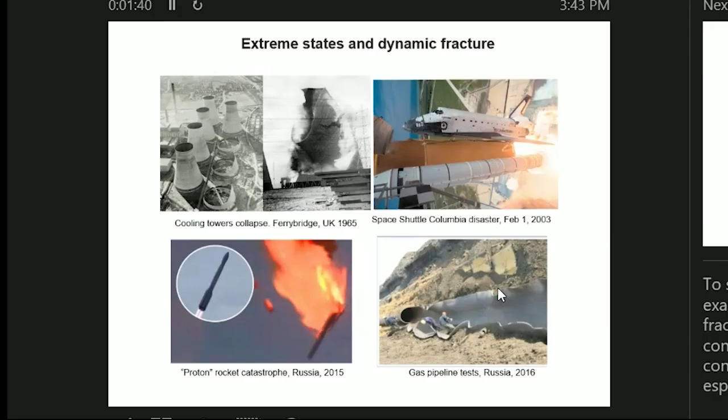I'll skip this motivation part. It's obvious that it's very important to know some dynamic characteristics and parameters of the fracture process, to prevent these kinds of events, for safety and so on. We use materials in dynamic conditions all the time, in aerospace, defense, microelectronics, but surprisingly we still don't have proper engineering standards for dynamics.

And why? It's because the material parameters measured under slow loading in static conditions become dramatically unstable and unreliable under dynamic conditions.

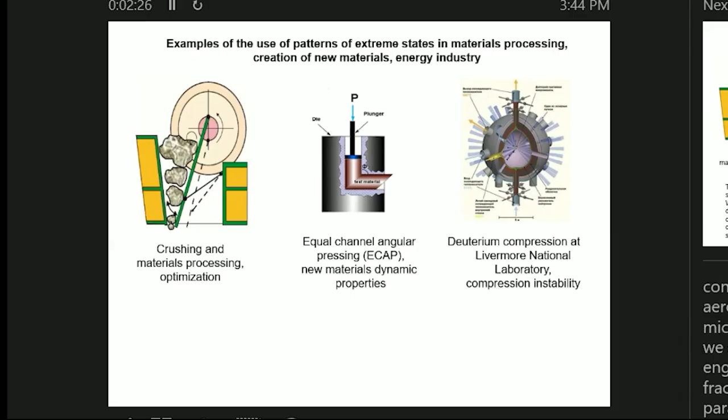But I'm going to emphasize the main question: do we actually think dynamically? It seems that by default we think quasi-statically, looking for equilibrium even in dynamic situations. And it prevents us from understanding some of the principal features of dynamics.

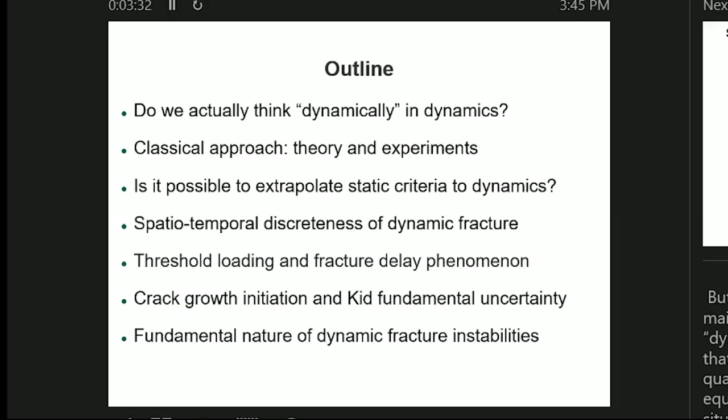I just want to start with a very simple, even primitive example of the problem of tension of a rod that I work out with my students, just to demonstrate this thing. I mention that I stretch the rod in statics and in dynamics, and I'm interested in the internal energy of the rod. The internal energy of the rod in quasi-statics is P squared, where P is just a stretching force.

The static task is boring, very boring, but dynamic looks much more fun. We have to solve the wave equation with boundary conditions, and then I'm interested in this energy, internal energy. This is an integral over the rod. It consists of two parts: kinetic energy and energy of deformation.

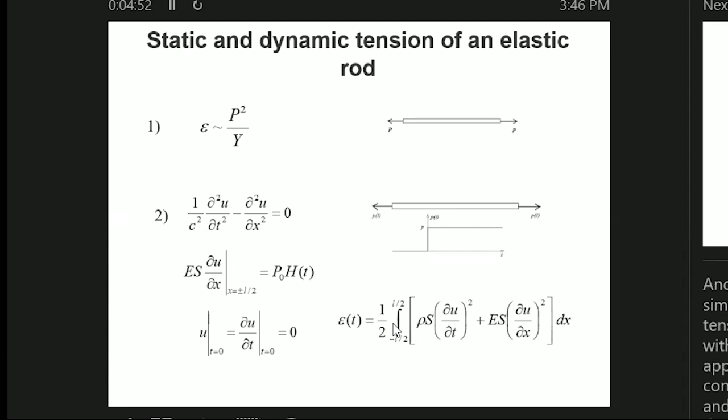So I will just calculate this integral, and the result is over there. So we have an internal energy of a dynamically loaded rod, which looks kind of paradoxical. So the energy disappears periodically.

Imagine that I have a rod, I apply tension, and I keep these forces constant, and the internal energy periodically disappears. The question arises: where does the energy go? It looks like a paradox, but actually everything is okay with the energy.

Just remember that we have a force potential, and the total energy of the system must include the force potential here. Being included in the Lagrangian, we will have a Hamiltonian principle, which would give us our problem.

And so there is an energy exchange. Mathematically this is a force potential, but engineers would say that there is a loading machine. And the whole system is a rod plus loading machine.

This is an energy exchange between our rod and the loading machine, and it comes to this effect, so that it seems the energy disappears periodically, but it is just an energy exchange. Our rod is like kind of breathing - it takes energy from the machine and gives it back. This is dynamics, as opposed to statics - the simplest problem of rod tension demonstrates the principal difference of statics and dynamics, even in these equilibrium conditions.

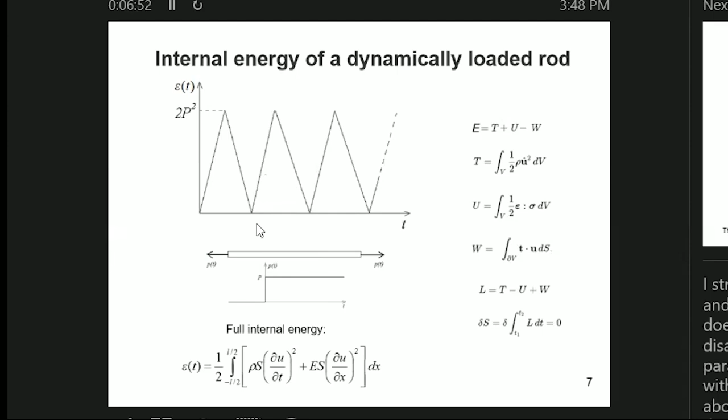And it is well known in practical engineering. Engineering practice knows this, and it works in the industry. Optimal characteristics of periodic impact are possible, and it's used in the crushing and processing of mining materials. Industrial engineers know well that the average lumpiness of crushed rock, or the average size of rock pieces, is very important for frequency and impact duration control. So it is utilized, okay.

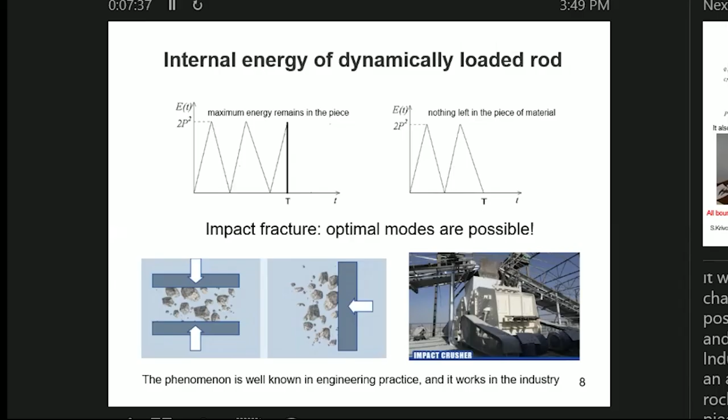This turns out to be very fundamentally important when conducting dynamic tests on materials for crack resistance. Removing the load before the moment of fracture allows you to know the energy of the samples and the characteristics of crack propagation in extreme dynamic situations.

This is a magnetopulse generator we have; we utilize this system to produce explosive-like controlled loading in the plate. This is a plate with the crack, and we can produce a magnetic field here, which gives us the controllable pressure at the level of a chemical explosion. In this case we have a fracture event just at the moment when our sample doesn't interact with any support, so we can know all the energy stored in the sample.

And so it allows us to evaluate the so-called Griffith's constant in dynamics. We did it, and this Griffith's specific energy constant in dynamics, at microsecond duration, turns out to be 20 to 30 times bigger than the same characteristic in quasi-statics.

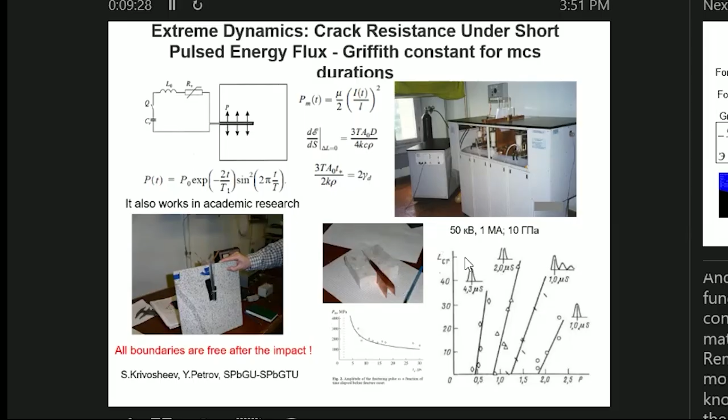This is a very closely linked problem, the simplest primitive problem of rod tension and this experimental technology. They are based on the same principle. As for fracture mechanics and crack propagation, this is just a classical approach, with Griffith's traditionally crack growth described using stress intensity factors, and particularly Irwin's criterion coming from the Griffith energy flux idea is utilized.

The thinking for dynamics is that once you know the material, there is a unique relationship between the crack velocity and the stress intensity factor, or the energy flux needed to sustain crack propagation. This KV relation between K1 and velocity is supposed to be a material function. It directly follows from the energy balance, Griffith's energy balance, applied to the dynamically loaded, moving crack.

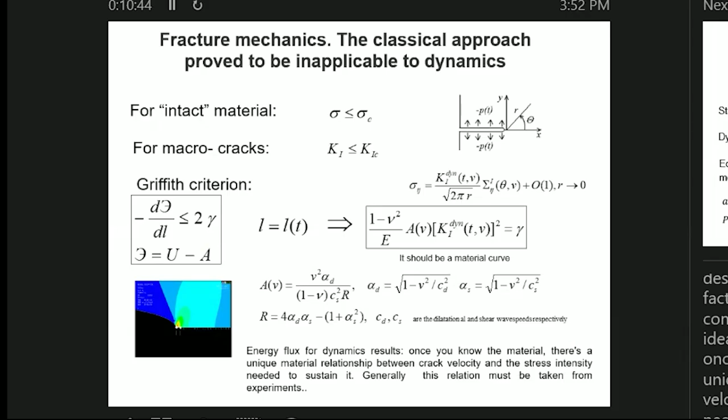And in terms of stress intensity factor, we have to talk about the right parts of these critical conditions, when we have a dependence - strain rate dependence, loading rate, local loading rate dependence, or dependence on the velocity of crack propagation. This also is interpreted as a material property. It's just an equivalent approach.

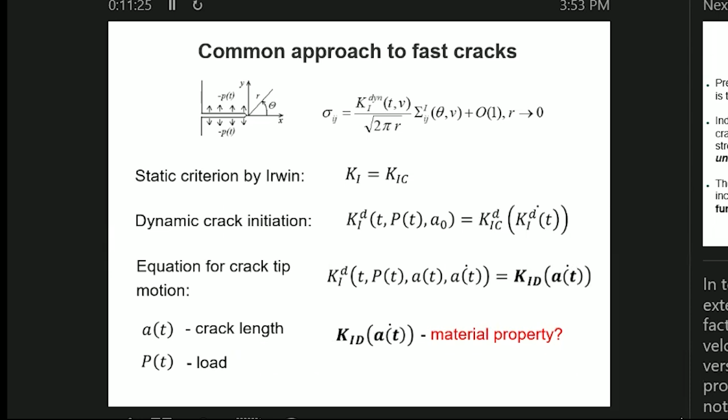But is that actually a material property? Experiments suggest it may not be so simple. From this classical approach it follows that it predicts the maximum speed a crack may attain as the Rayleigh surface wave speed, and it indicates there is a unique relation between energy flux, or crack driving forces characterized in terms of dynamic stress intensity factors, and the crack speed.

So a unique material curve is required, taken from some experiments. The classic model and the majority of its modifications include the dependencies of the considered material functions as the right part of these previously written equations. How is this confirmed by experiments? This is a result of extrapolating our quasi-static thinking to dynamics. It is only partly confirmed by experiments - I would say even that nothing of that is definitely confirmed by experiments.

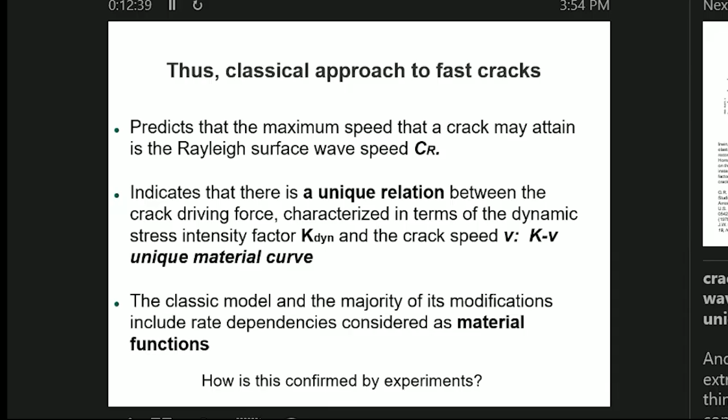So this is how it looks in the experimental field. Let's look more closely at that. This is a classification of some experiments in this field. I took only classic measurements, and this classification is very conditional and approximate, but it reflects our situation well.

In some experiments, like Irwin's and Dally's experiments, very classic experiments, we see smooth and consistent KV curves like this one - a KV relation. Others, like Kalthoff's experiments, show major differences depending on the sample geometry. He used different geometries of the samples and established that this kind of KV dependency is not a material curve - it depends on the geometry.

There's another group of experiments. The first group is associated with slow loading, when we accelerate the crack from zero to some essential velocity. But there is another group of experiments with impact loading, such as the Ravi-Chandar and Knauss experiments, a very famous classic work.

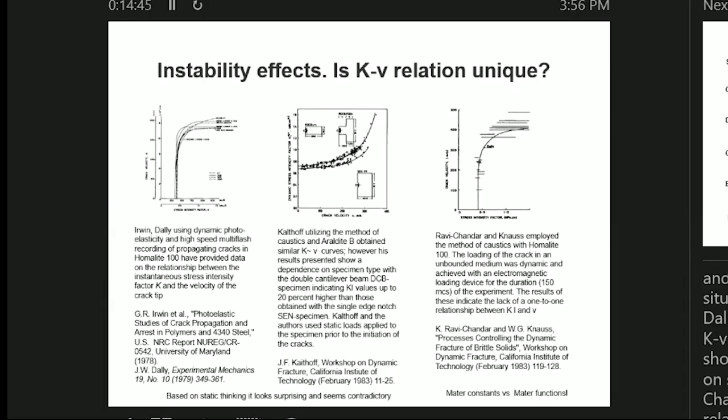It just looks very contradictory. To make sense of this, we've been developing a new approach over the years, built around a different idea - the characteristic time. We have dynamics, and there is a very essential thing - a time scale should be involved, not only as a parameter, not only as an additional dimension.

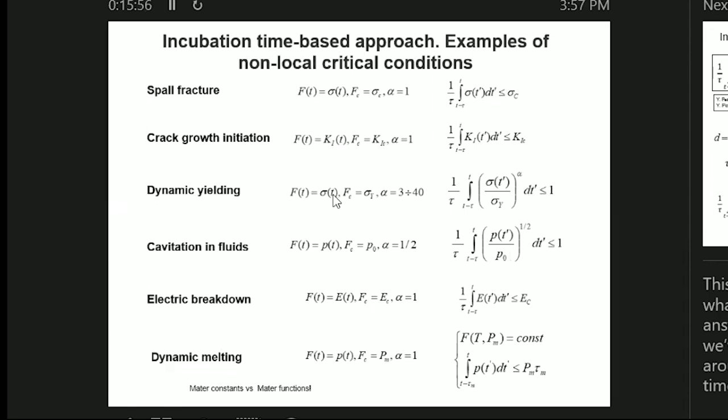We are talking about the characteristic time - this is an incubation-based approach based on characteristic times, which was realized in different fields: for spall fracture, for crack growth initiation, for dynamic yielding, as Dr. Zhao Shisan told before, cavitation in fluids, electrical breakdown, and dynamic melting. But I will just talk about crack propagation now.

This is an example of how it works. In the case of quasi-brittle cracks, we have this critical condition, and there's a new parameter called the incubation time. It defines the duration over which the stress must act to actually cause fracture. The criterion is not just about force, but about how long that force acts. The incubation time criterion is essentially non-local in space and time, and we consider the minimal fracture event - a minimal crack jump in our case - on the given scale level.

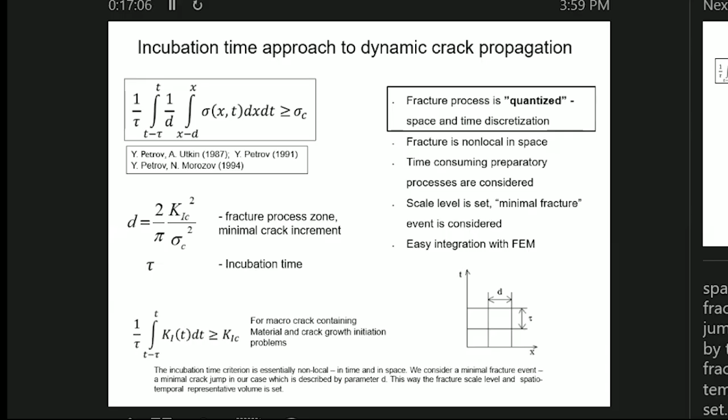This way, the fracture scale level and spatio-temporal representative volume should be introduced, like this one, in space and time. We have two linear sizes - a linear size in space, the fracture linear size, and the corresponding size on the time scale. This is the approach. And here's how it works: imagine we have a semi-infinite crack, and we apply a pressure to this crack.

And then we have a pressure of this kind, like a rectangular pulse or trapezoidal pulse, that acts up to the moment of fracture. And this is a stress intensity factor growing up to the moment of fracture.

And now I just take this moment of fracture as a duration and stop loading. And then I conduct the second experiment with this duration. And I will just decrease a little bit this amplitude. What happens if we still will have the fracture?

It turns out that, yes, we will still have the fracture. This is a new position of my amplitude. But the fracture will be on the decreasing stage of the stress intensity factor. And so this way we can come to the threshold loading, so the lower loads will not produce the fracture.

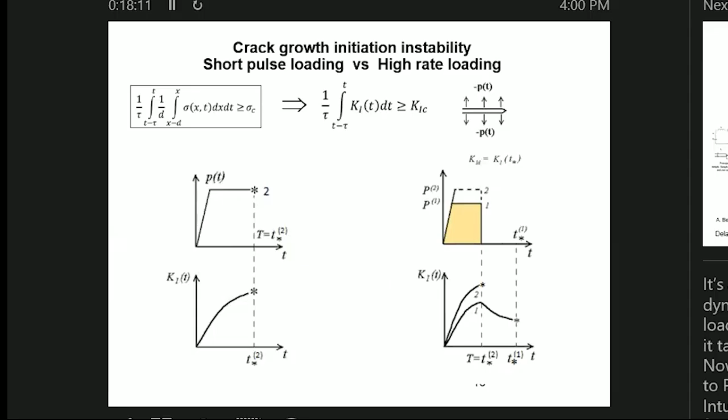But in this case, this is observed experimentally. This is the experimental procedure that would allow us to get it.

So when we conducted experiment by pulse magnetic field and started to investigate the microsecond durations of the pulses and found the threshold amplitudes, we got the fracture delay in PMMA, so that the crack stress intensity dropped 5 times before the crack started to propagate here.

It was first predicted and calculated by Shockey and Kalthoff in these classical works, but it was a tiny fracture delay, while we could measure this big one.

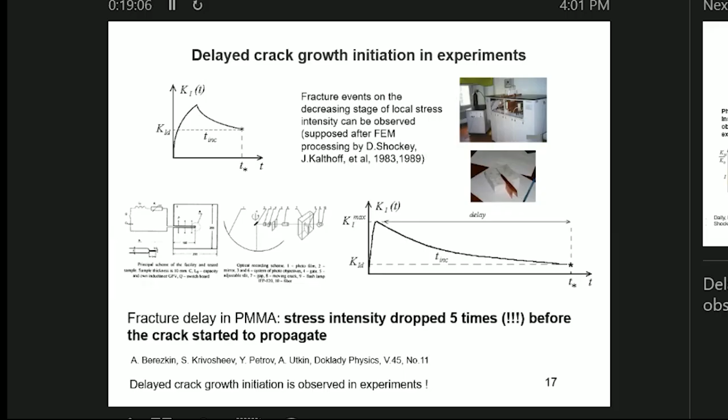And so the calculation doesn't need material curves, it's based only on material constants. Two constants are needed here, K1C and the incubation time, to get this phenomenon.

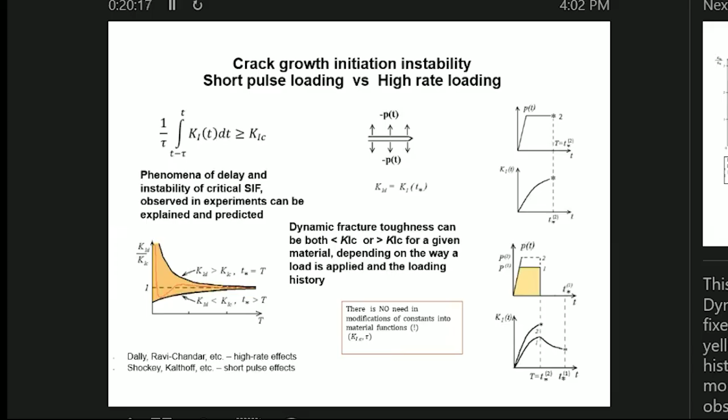This is just an example of how it is realized for particular materials.

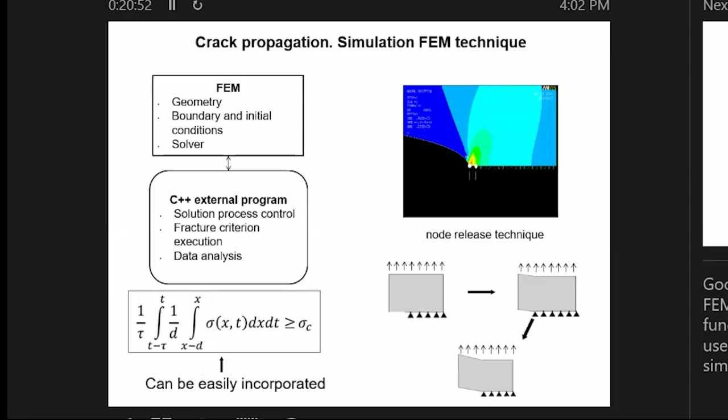Now I want to apply it to crack propagation, and I want to consider crack propagation, so it can be easily incorporated into the finite element technique with the special node release technique. So this is a criterion that can be incorporated into any finite element scheme, and we are still within the frameworks of linear elasticity and linear fracture mechanics.

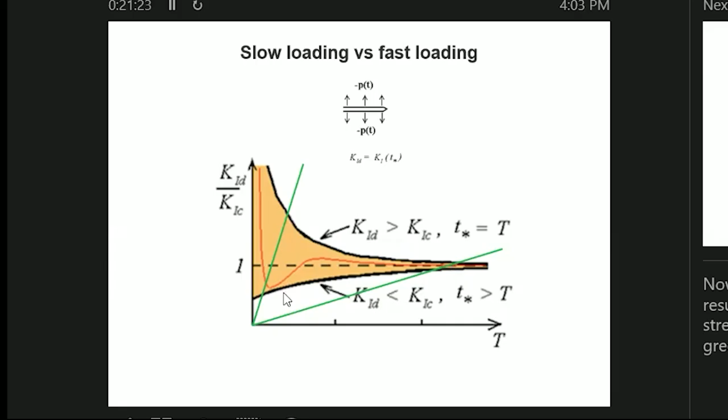Now I want to consider two schemes: the quasi-static scheme, which was conducted by Professor Kalthoff, based on the double cantilever beam specimen and the single edge notch specimen, where we accelerate the crack up to certain values of crack velocity from quasi-statics. And another scheme like Ravi-Chandar and Knauss realized, with a big plate loaded by a very intensive impact.

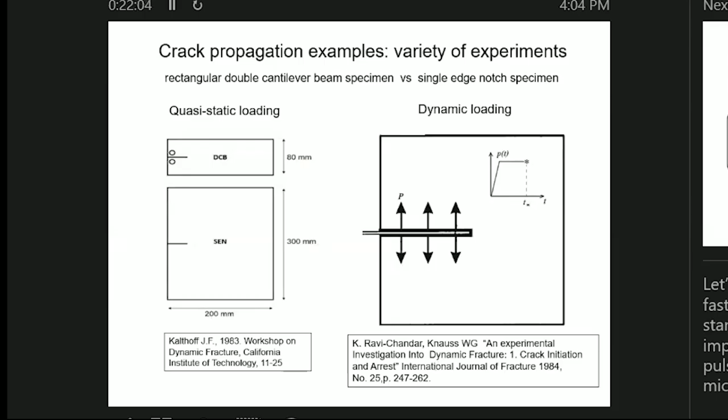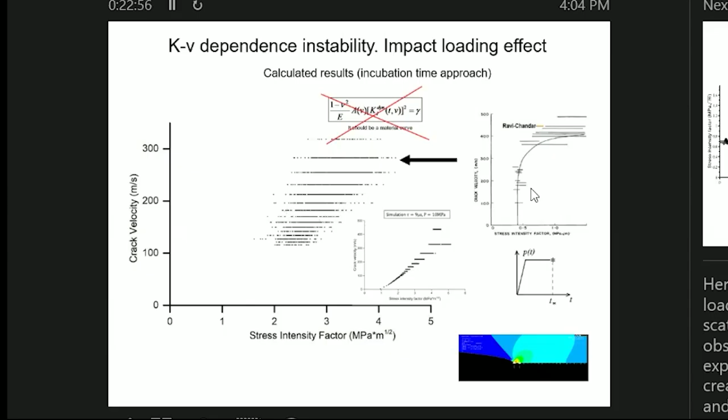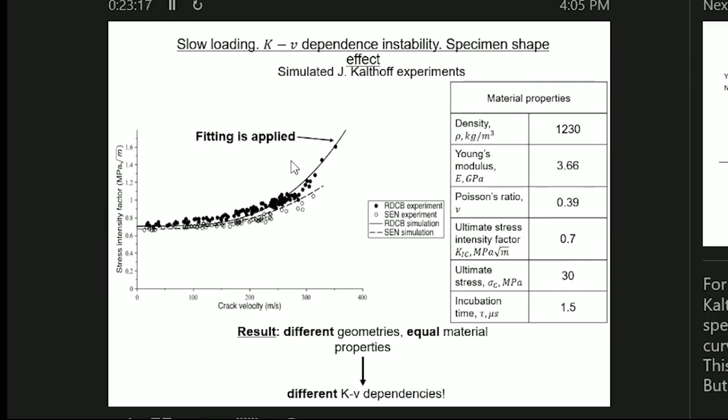What is fitting? It means that when we have slow loading, we actually observe scatter in the stress intensity factor, but in very small ranges, so we can approximate it by a smooth dependency between K and V. That says if the loading is slow, we can draw a smooth KV curve.

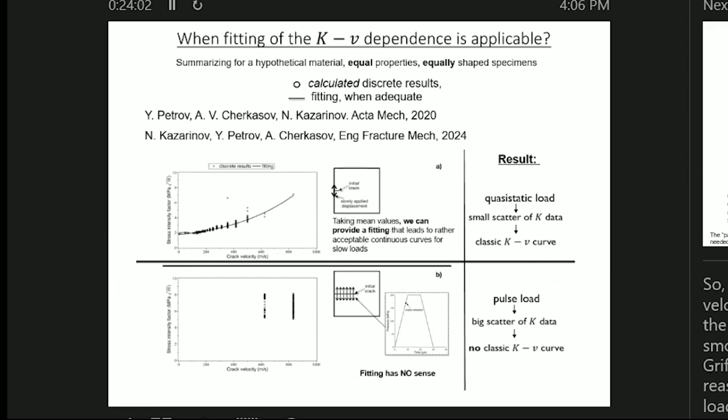That's close to what Griffith's theory predicts, and it works reasonably well under gentle, slow loadings. Our results match experiments, at least qualitatively, and explain the KV paradox.

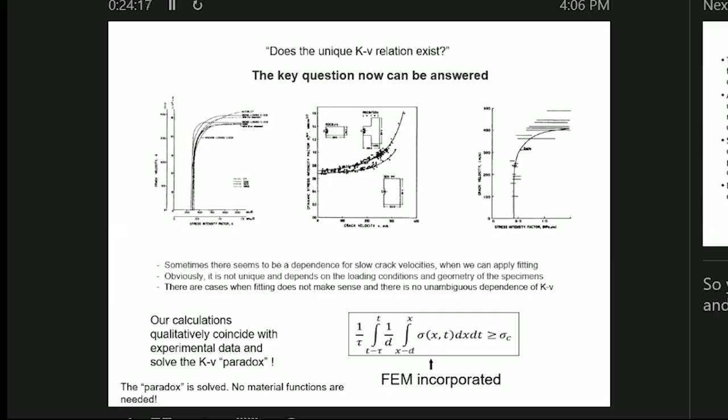So this is the conclusion. The model contains a minimal set of material constants and does not contain material functions at all.

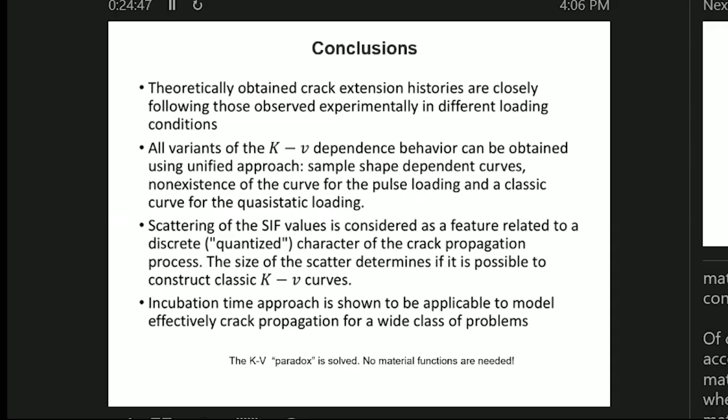Of course, this is far from taking into account all the features of different materials. This is a phenomenology where microstructural features of the material influence the basic material parameters of the model, but it is approximately right. So thank you for this.